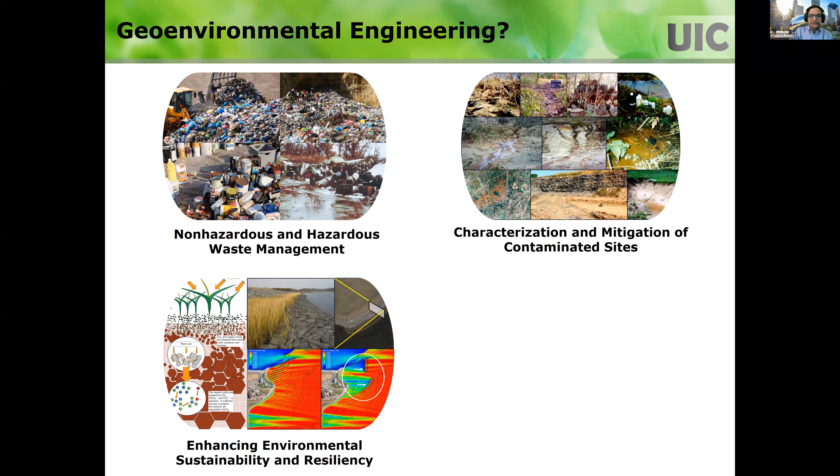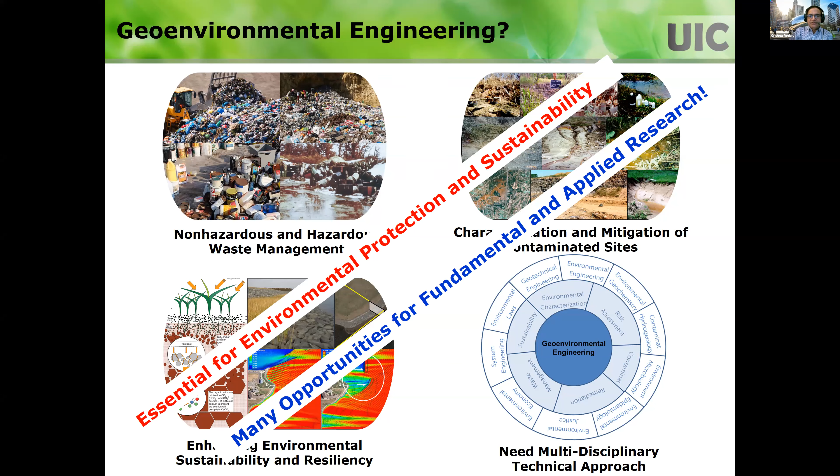Geoenvironmental engineering is a very broad field, dealing with waste management, mitigation of contaminated sites, and this broad area of sustainability and resiliency. It's not just geotechnical engineering or environmental engineering, it's a combination of those two fields, as well as a lot of other multidisciplinary background that you need for these kinds of geoenvironmental problems.

Can you see the presentation? Yeah, I can see it and I can hear you well. Yeah.

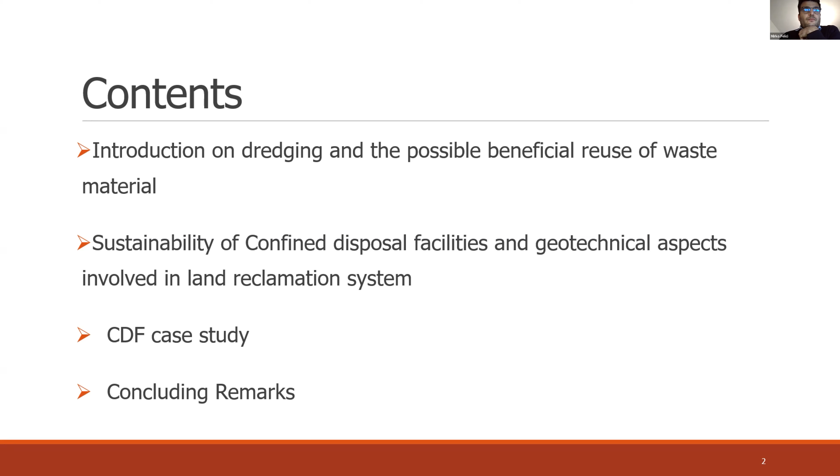Maritime shipping is considered the most fuel-efficient mode of transport. It moves approximately 90% of global trade, and so it is vital to domestic and international commerce. It is also considered a relatively environmental friendly transportation, accounting for less than 3% of global anthropogenic CO2 emissions.

Data here presented from 2020 show a significant upward trend for maritime trade demand. In this context, dredging is essential to develop and maintain navigable depth in ports, harbors, and coastal waters, as well as the development of port facilities. In fact, the reasons for dredging are principally capital dredging and maintenance dredging.

In this context, moreover, we can cite that environmental reasons could have great importance when it is necessary to remove material, for instance in a former industrial site where the level of contamination is very high. Referring only to our little country, Italy, the estimated dredging demand is about 130 million cubic meters for these years. This is a huge number that lets us understand how this problem has to be considered as an environmental problem and environmental issue.

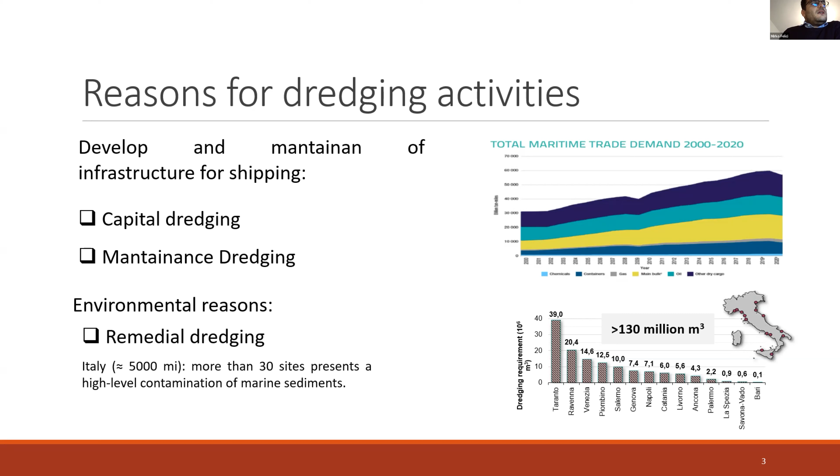We see how the dredging project has to be developed. Particularly, preliminary characterization of the material to be removed has to be done in order to evaluate its environmental quality through chemical, physical, and ecotoxicological analysis. Then we have to choose the most appropriate technology according to the seabed characteristics and to the sediment contamination also. For instance, in case of remedial dredging, we have to use technologies capable of limiting the resuspension of the solids and consequently the bioavailability of the contaminants. Afterward, places of relocation and possible recycling, on the basis of their environmental quality, have to be provided in advance.

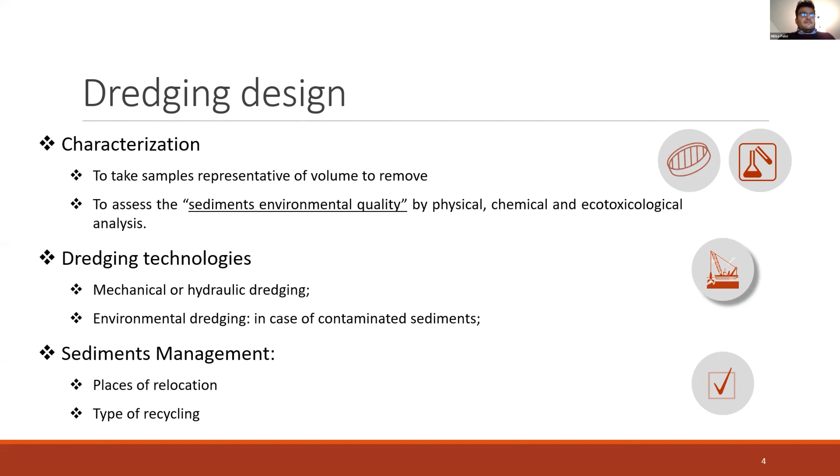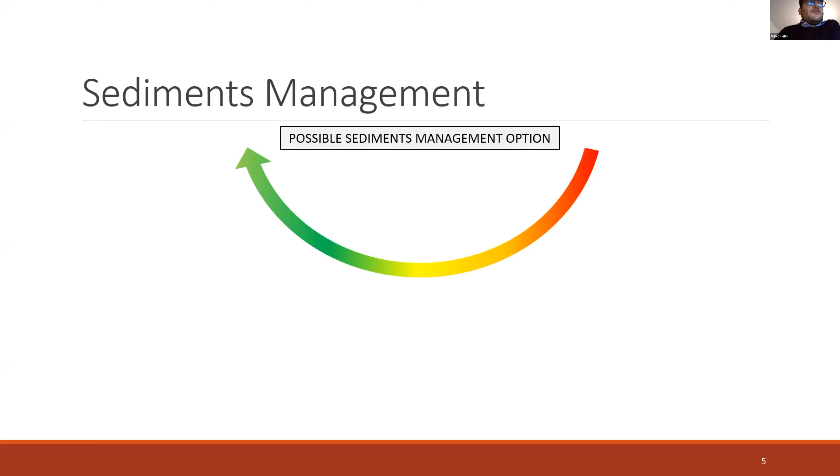Possible sediment management options depend on their environmental classes. In the box, you find the best possible use admitted from the environmental point of view. In Italy, for instance, quality classes from A to E are identified on the basis of the before-dredging characterization. Class A is the most clean sediment, usable for example for beach nourishment, and so there are no problems with A-class sediments.

The B class has very low contamination, and in fact there is the possibility to discharge the material at sea in special areas previously identified. The negative sides of this practice are well known, and it can only be used where other options are not feasible under the actual regulation. In fact, the negative sides of the practice are well known and it is too often abused, sometimes due to lack of planning in sediment management.

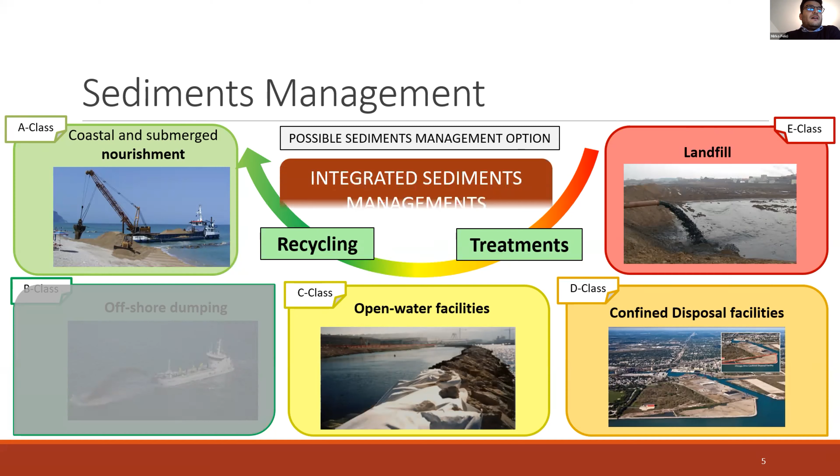In the decision-making process, a fundamental role is reserved to the possibility of recycling the sediment and carrying out treatments to recover part of it or decrease its contamination. The goal is to transform the sediment into a resource by pursuing the beneficial reuse of as much of it as possible. To this regard, an integrated approach of sediment management has to be developed.

A sustainable approach to this problem should be similar, in my opinion, to that used for waste, with methodic collecting and sorting, creating a range of facilities awaiting the dredged sediment as resources to be treated and transformed into recycled material, or simply reused as is in confined disposal facilities, for instance, or for a minor part disposed of in landfill when inevitable. The goal, however, is to minimize the amount of material taken to landfill, and especially that dumped into the sea.

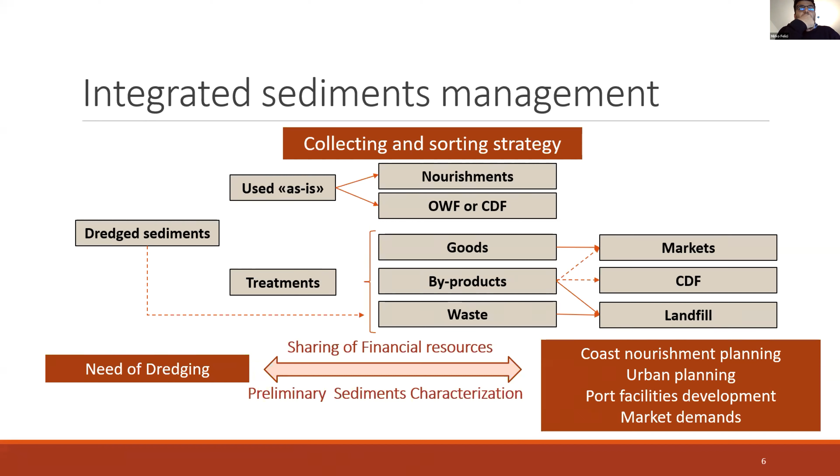To do this, we have to think of an integrated approach that links the need of dredging with those of coastal nourishment, urban planning, port facility development, and all markets and sectors interested in recycled goods from sediments - for instance, construction material or agronomic uses. I think a comprehensive approach to the dredging problem is justifiable in light of the large quantities involved and the volume of investment that has to be done by administrations every year, continuously.

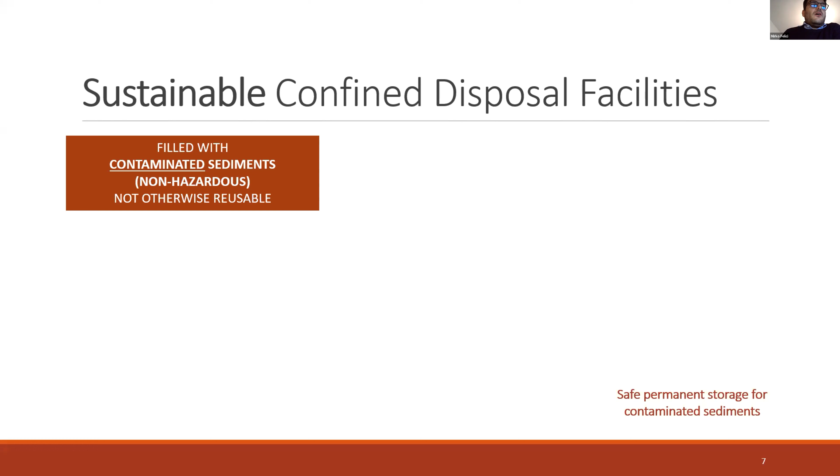So in this context, I would deepen into confined disposal facility roles and address the issue of the sustainability of their construction. First of all, because of high investment costs, in the CDF should end up only the non-recoverable parts, that usually have a medium level of contamination, non-hazardous, and are also fine-grained. Often the sediment that goes into confined disposal facilities is fine-grained because it is less valuable than the coarse part.

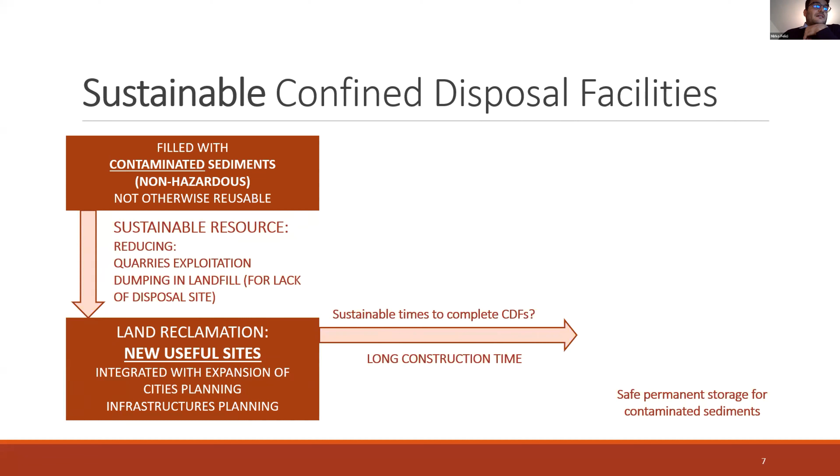So in this way, they can become a sustainable resource, for example in land reclamation projects, integrated with urban expansion planning to create new useful sites that should surely be integrated with the expansion of the city and planning. To this point, a long-term program is required, also due to the long construction time of the CDF.

The advantage is that the CDF remains available for managing multiple dredging operations over time, and in harbor contexts it could be useful, for instance, to provide partializing of the CDF to have the facility available for sediment disposal during time, while in the meanwhile using part of the area already filled.

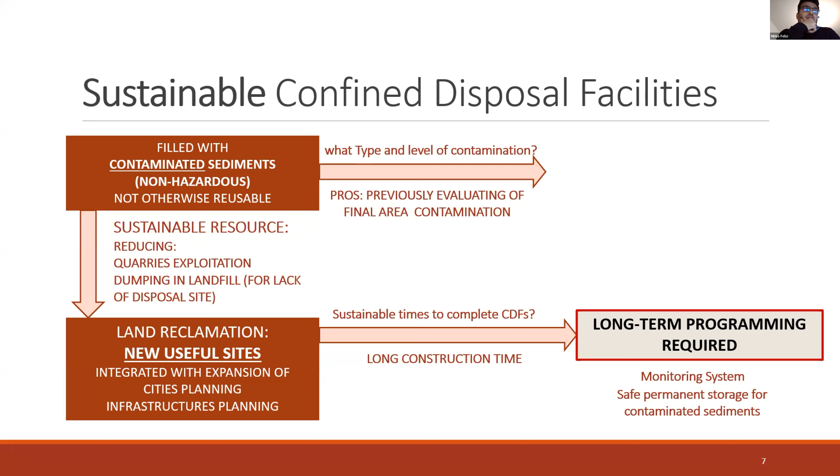But what type of contamination do we have to consider? Contamination level surely must be below the maximum level associated with the intended use of the facility. For example, when we think of green urban areas or industrial ones, the national regulation in Italy, for example - but I think in all countries - gives us different referring for the reuse of this material, and for the maximum level of contamination associated with this intended use. This is very important because otherwise it could generate a paradoxical situation in which we need to perform remediation in order to reuse the area after disposal, which has to be avoided, surely.

Long-term monitoring is important and has to be done in order to guarantee the efficiency of the system in the long-term conditions, surely.

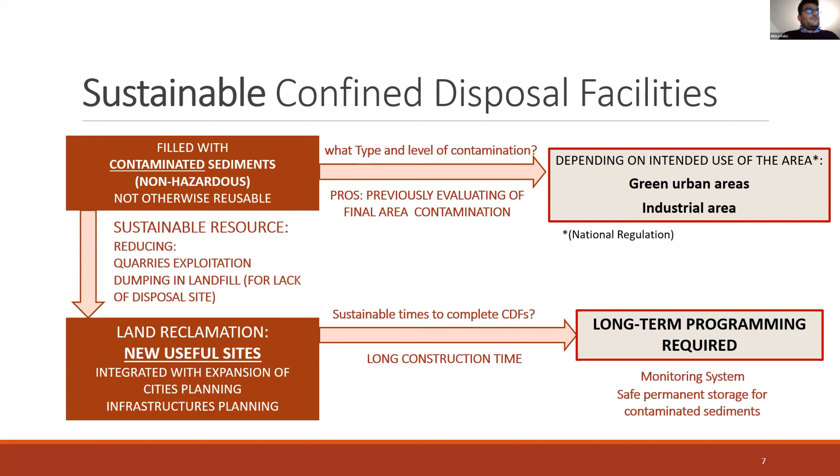The geotechnical and geoenvironmental aspects of a CDF project ensure that the impervious confinement guarantees the performance requested by national regulation, namely low permeability natural or artificial boundary, lateral and bottom, have to be at least equivalent to 1 meter of soil with permeability of 10 to the power minus 9 meters per second.

And organize the filling phase in function of the subsequent consolidation phase. Moreover, after disposal and sedimentation, dredged sediment typically has a very high void ratio, so it is necessary to design a consolidation strategy to make the area usable. Finally, determination of useful information on sediment behavior is essential to design the consolidation system and to provide a reliable prediction model.

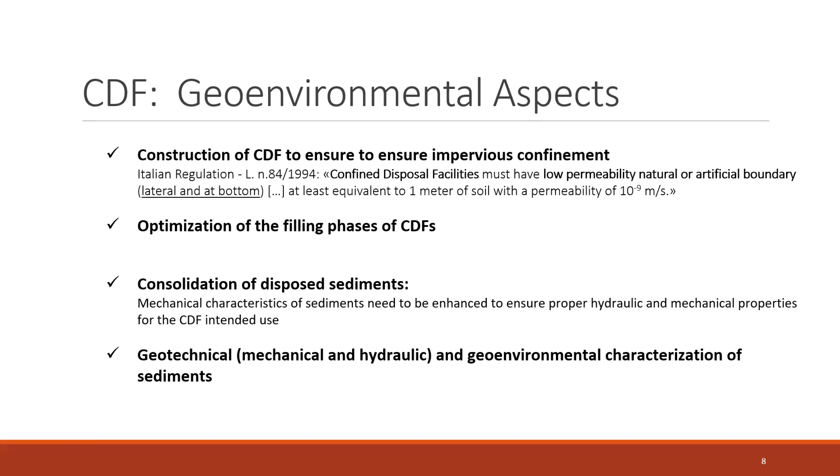To gain the first goal, the typical lateral cutoff that could be done is made by, for instance, a special sheet pile barrier with joint impermeabilization, or by a plastic barrier made with CB mixture. This last solution has different approaches for the land side, where excavation could be made with a round bucket or with a hydromill machine, and for the seaside, where the solution provides two sheet pile walls with CB mixture in the middle.

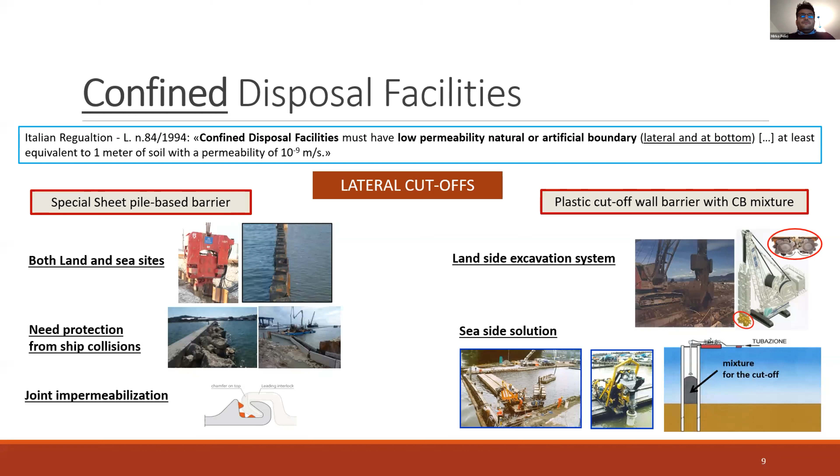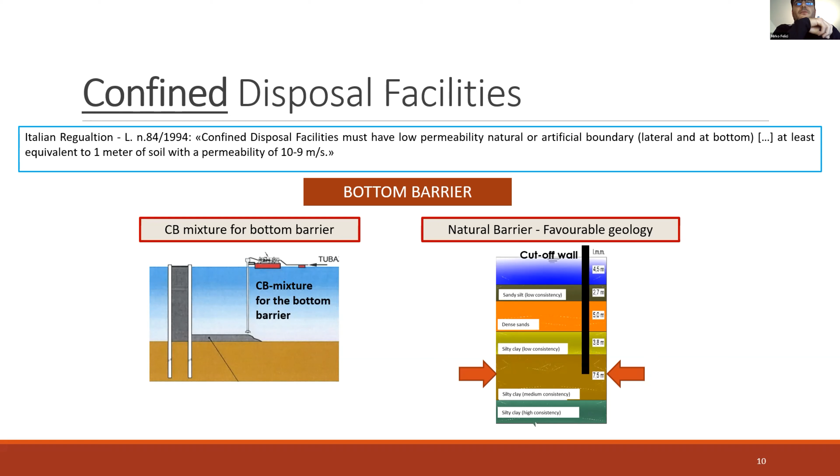CB mixture could also be used for the bottom barrier of the CDF. This is a typical solution, but it's not necessary if the CDF site has a natural low permeability layer underneath. So if the geology is favorable, we can use the cutoff wall to create the bottom barrier with the same low permeability layer.

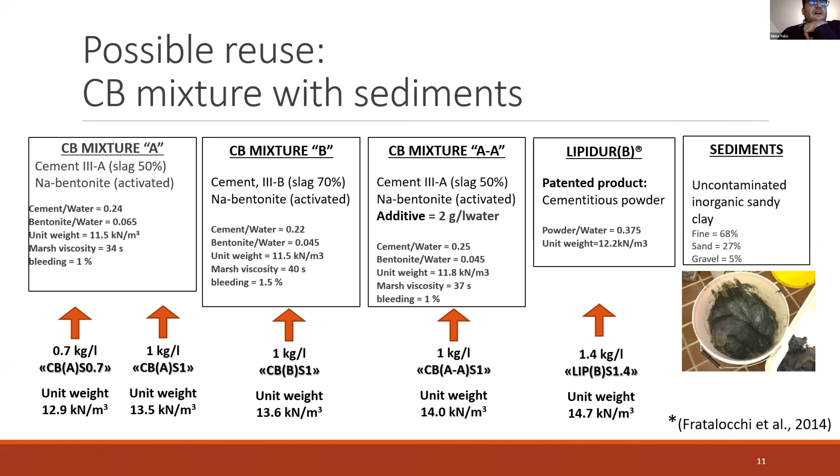Regarding the CB mixture used for the boundaries of CDF, I would show you a research carried out by Professor Fratalocchi, who studied the possibility of reusing sediments in a ternary mixture of cement, bentonite, and water. A quantity of sediment up to 1.4 kilogram per liter of mixture was added to different types of mixtures and studied in a flexible wall permeameter by means of long-term permeation in tap water and seawater.

We can see some results that show good behavior of all the mixtures in tap water, but we observe an increase in permeability of the conventional mixture in seawater. This does not happen in mixtures with fluidifying additive, and for the patented product that continues to show good results even in the long term.

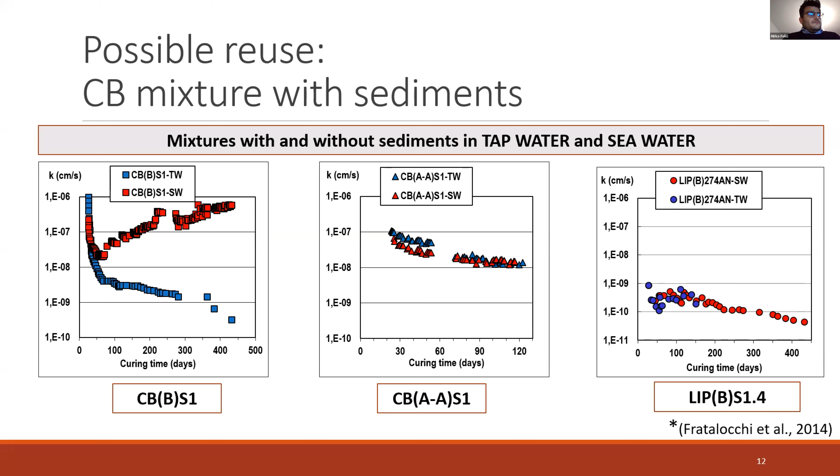When the CDF is filled and water is inside, we have to expel it into the sea. For this reason, CDFs are provided with floodgates. This operation could be a problem in presence of contaminated sediments that could be subjected to release of pollutants. It depends on the type of contaminant and the duration of exposure. In this context, water treatments could be necessary before proceeding to discharge the water.

Management of water could be a serious issue in the design of CDF, especially in the case of hydraulic disposal, which could introduce into the tank up to 10 parts of water for each part of solid, to give an idea, in a very short time. In case of mechanical disposal, instead, the volume of water is much lower, so it's preferable when possible.

Italian regulation is not very clear for the specific cases of water management. In different cases, we have found different approaches from different administrations. However, the respect of the non-regressive principle for the environment is always valid, so the discharge has to be done in a safe way.

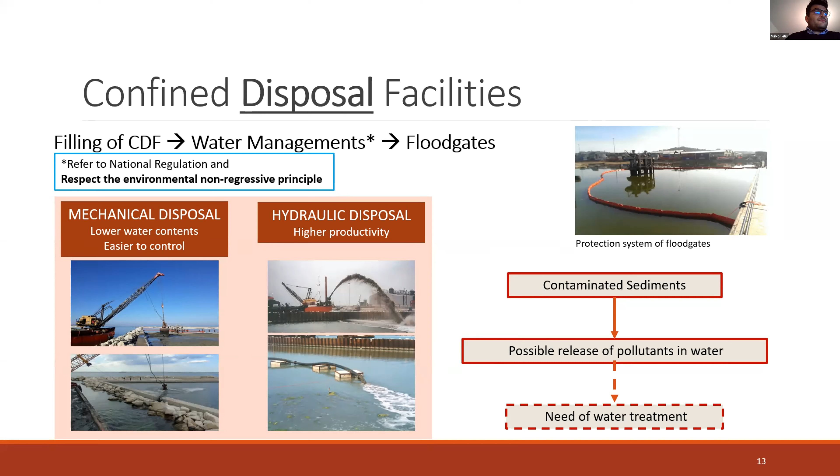After the sediment management process, it is desirable, as I have already said, that the CDF is conferred the less valuable and averagely contaminated part of sediments, which are usually characterized by fine particle size. Therefore, here I present only some of the possible technologies for the improvement of soil characteristics. In particular, I wanted to focus on two possibilities: treatment before and treatment after disposal.

The technique that allows at the same time to improve the mechanical characteristics of the sediment before disposal and to obtain a treatment that limits the mobility of some contaminants is solidification and stabilization with cementitious binders or lime. It can be realized by means of an inline plant that processes the material before it's laid in the CDF. In literature, there are some studies that have tested techniques with also sustainable cement, which is very interesting for the issue.

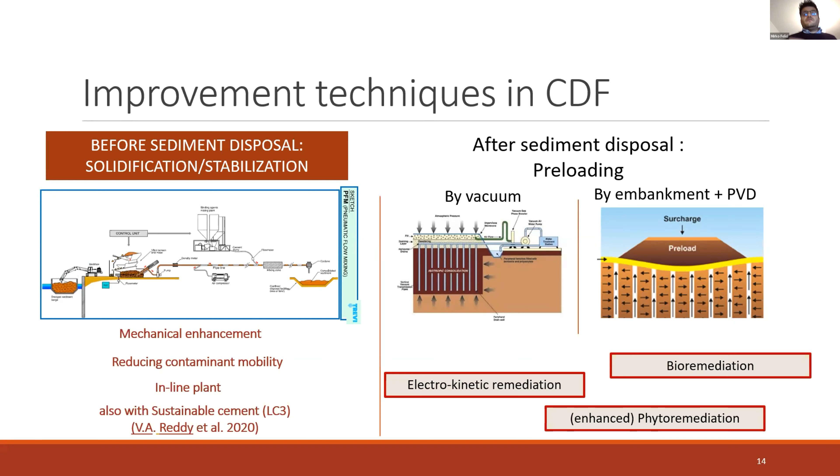We go into the case history, where I want to present the case of the Ancona administration that some years ago proposed an integrated sediment management at regional scale, trying to connect the supply - the sediments to be dredged in the different ports of the Marche region - and the demand of the territory, in particular coastal nourishments and the needing of the harbor of Ancona for a new container stocking area, land reclamation for a seafront of the city of Ancona, and the new cruise ship port, always in Ancona harbor.

This is a good example where the administration tries to use all the funding available to anticipate the problem of dredging and the necessity of the territory. In particular, a preliminary characterization of sediment to be dredged in every port of the region has been done for the assessment of sediment quantity and quality, to create a sort of sediment bank from which the territory can take the supply, the necessary sediments to create a new site, or for instance coastal nourishments.

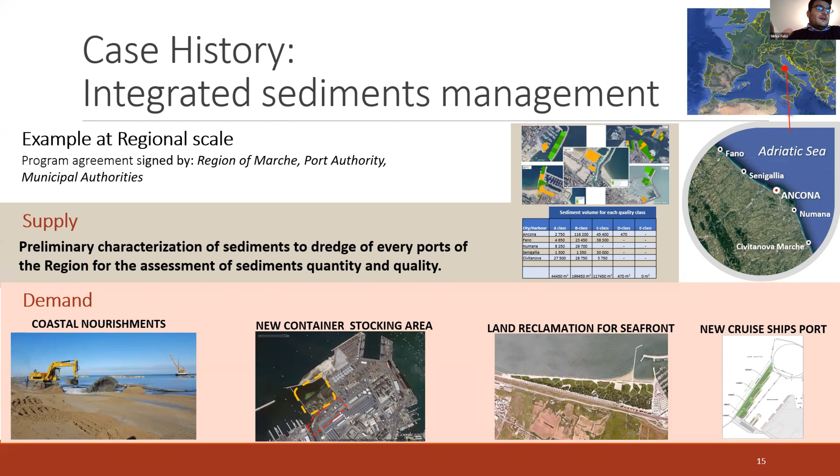In this context, the container storage area has to be thought of as a CDF, placed in Ancona Harbor, that has an overall capacity of 300,000 cubic meters, and that will be filled over several months with the sediment from the nearby ports.

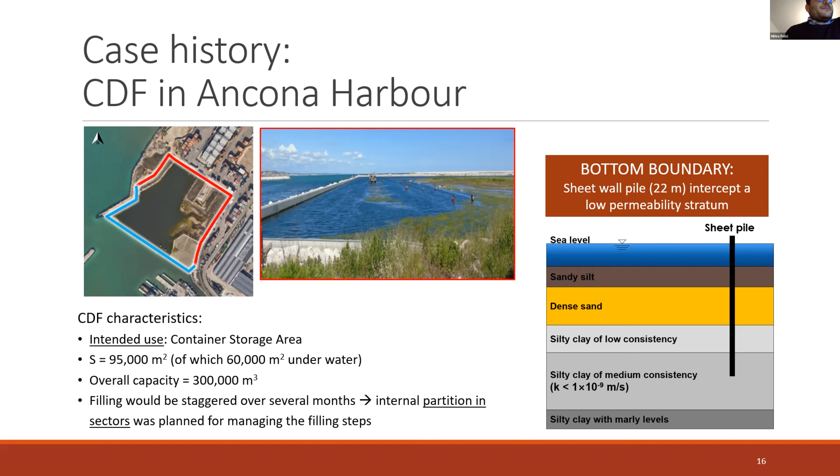The bottom boundary of the CDF in this case is done by a sheet wall pile that intercepts a low permeability stratum at a depth of about 20 meters. The lateral boundary is done by a sheet pile, and the joints have been made impermeable with a hydroexpansive synthetic resin to seal them. Moreover, an electrical system called Dixeran is being used to verify the continuity of the sheet pile with depth - that is another issue of the technology.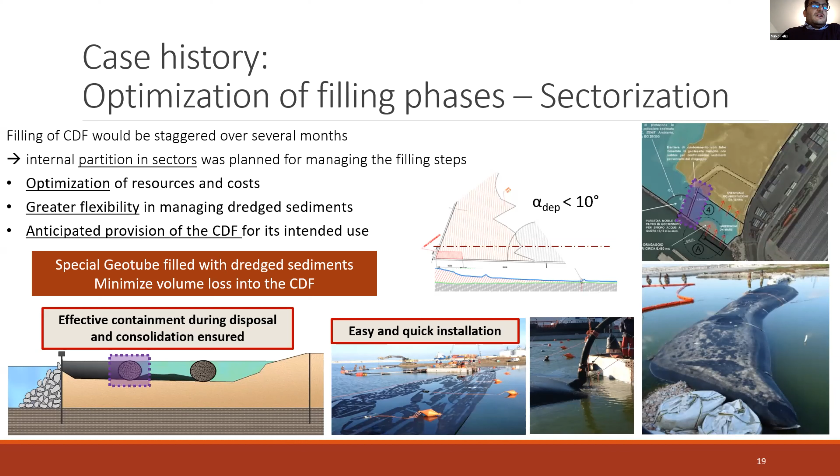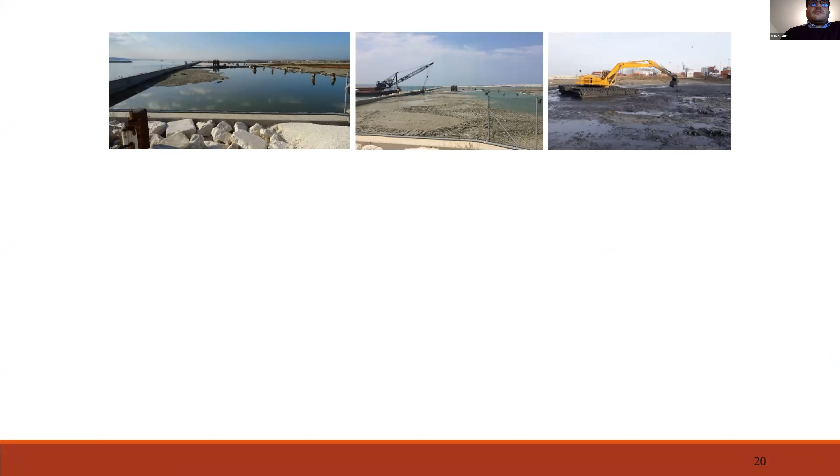So, to use the area for applying a consolidation system, we had to confine a sector of the CDF. This geotube solution was chosen because it could be filled with dredged sediment, minimizing volume loss into the CDF. It has been effective during the filling of the sectors, as we can see from this image, and there has been no instability of the geotube at the end of the filling.

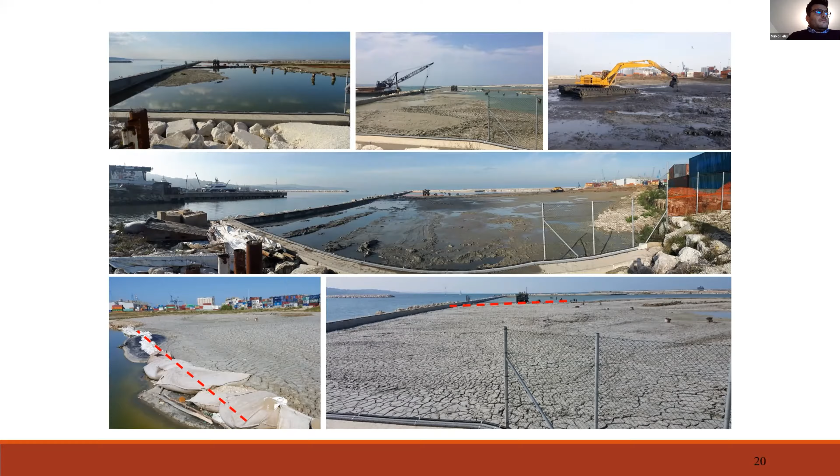The consolidation strategy chosen for the reuse of the area has been preloading by embankment coupled with prefabricated vertical drains. The reason we chose this strategy is that we had the availability on site of material for the construction of the preloading, recovered from the demolition of docks and port buildings during the CDF construction.

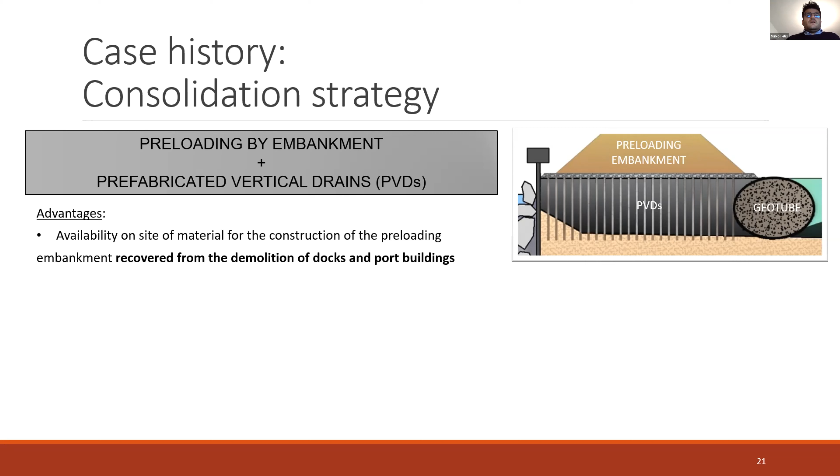So this material gave us the opportunity to use it as a moving bank - after the geotube placement and the disposal of sediment in the first sector, as shown in this scheme, the consolidation of sediment in the first sector could be done while simultaneously we fill the second sector. Then we can consolidate the second sector, and finally proceed with the consolidation of the geotube area. This procedure could significantly reduce the risks of instability in the zone close to the geotube.

So it's important not to go very close to this structure, because when we apply a high preloading, it could be dangerous.

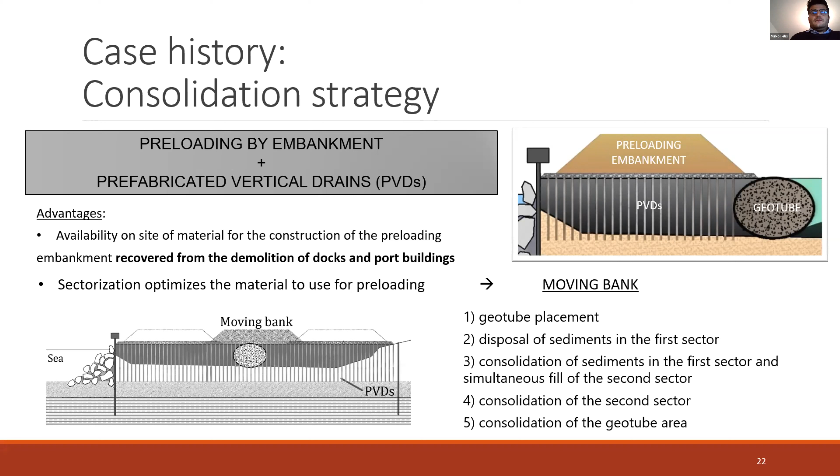With this procedure, we could significantly reduce time to get the CDF ready to use for its intended use, for a part of it almost.

After the filling of the sector, we decided to use the first sector as a test field to set up the operating procedure, firstly to verify the efficiency of the chosen strategy, and also to evaluate the real consolidation time and, by consequence, the embankment waiting time.

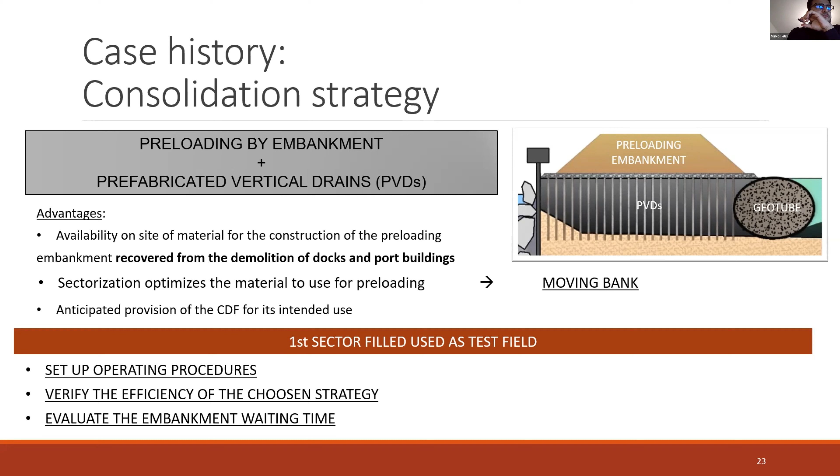A huge laboratory investigation was conducted on the sediments disposed in the first sector, which were characterized by predominant fine-grained composition. Oedometer and consolidometer tests have been carried out to investigate compressibility and permeability of the sediment, and some tests performed are reported. For further details, you could refer to the reference paper.

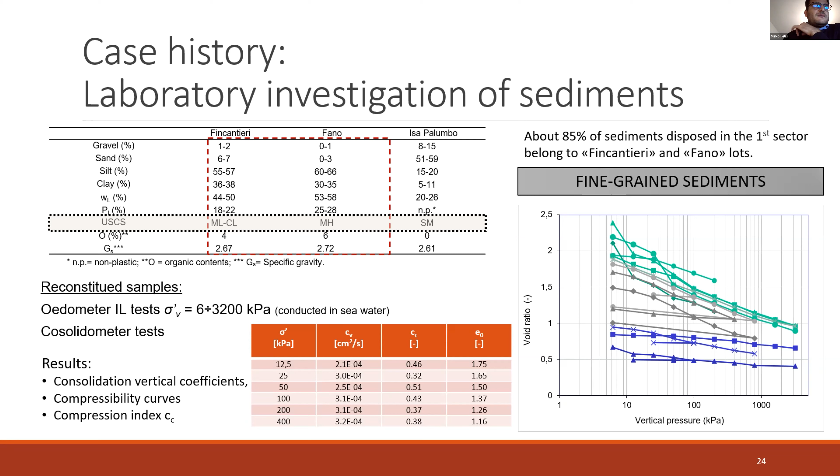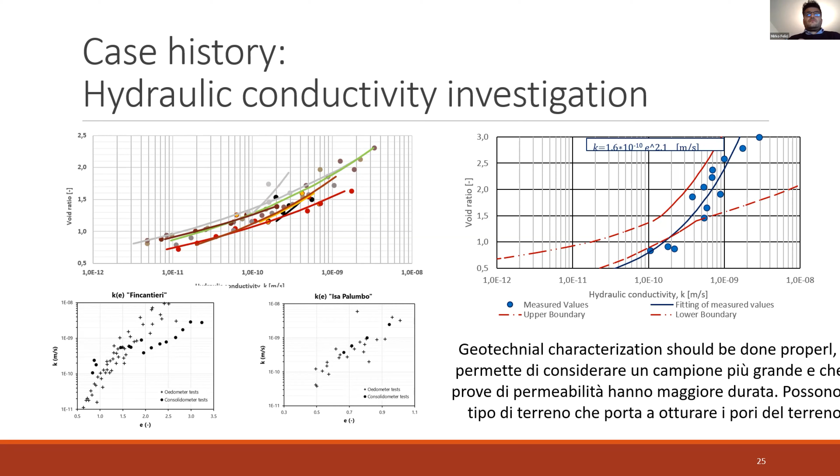An important part of the research is to establish the hydraulic conductivity of the sediments. As we can see, there is a spread of the results, deducted indirectly, determined by oedometer tests. We have done some new tests with direct measure in a rigid wall permeameter that show that the oedometer test tends to overestimate, at high void ratio, the hydraulic conductivity.

A very interesting research is being carried out that studies the compressibility and also the hydraulic conductivity of material when sediments have been used for treatments, for example, for bioremediation with bacterial and fungi.

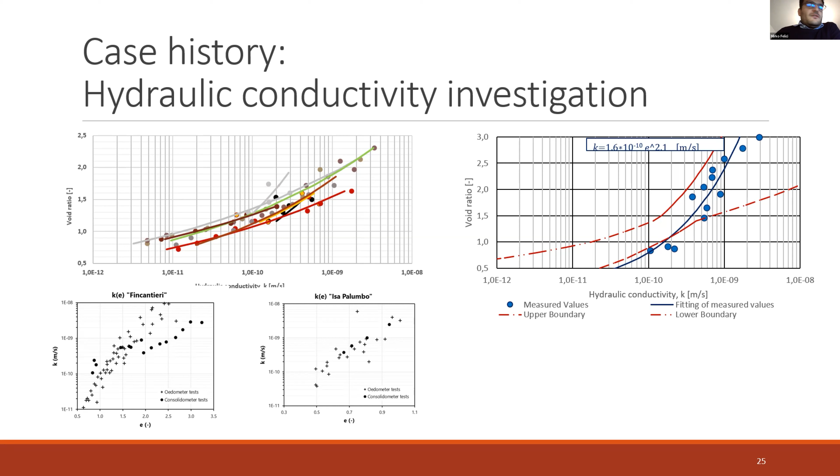Preliminary results of this research showed that there is no significant difference in the compressibility. For this kind of material, these are not obvious results, given that there is organic matter in the fine-grained sediments. I can't let you see the results because it's not published yet, so I only want to anticipate these results.

An in-situ investigation survey has been carried out to investigate the correct stratigraphy under the test field area and to estimate the mechanical and hydraulic parameters. The table summarizes the values of the main parameters assumed for the consolidation design.

We can see how the dissipation tests have been used to estimate the horizontal coefficient of consolidation.

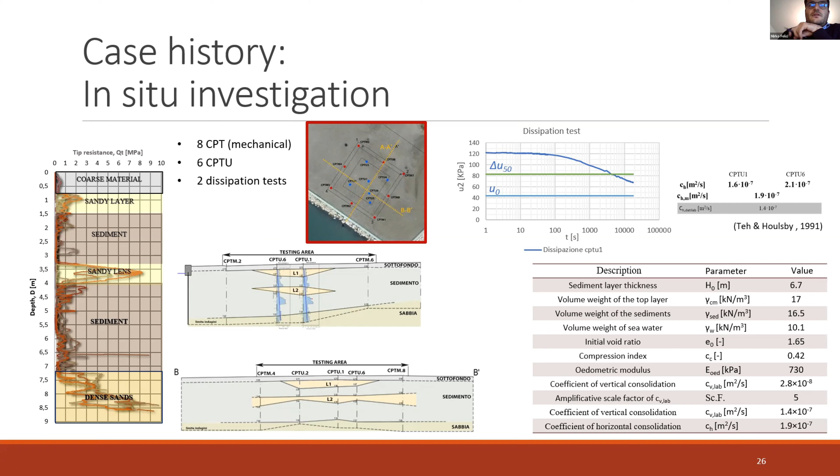The field scale test design has considered a stratigraphy with a coarse material that is useful as upper drainage, and fine-grained sediments of about 6.7 meters that are the compressible soil. A dense sand of about 8 meters depth is considered as a lower drainage to have double drainage conditions. This is possible because the stratum of dense sand is continuous for all the CDF.

Test field dimension is about 30 meters, and this is done to consider the one-dimensional deformation conditions. The service load is about 47 kilopascal (kPa).

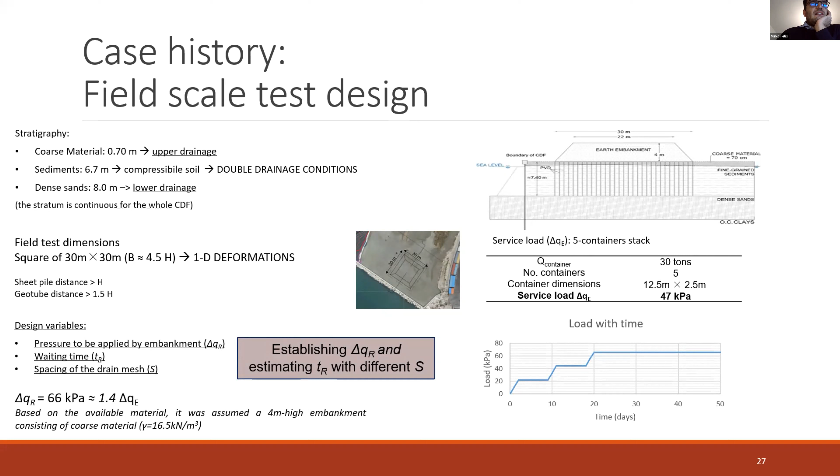The design variable considered is the pressure to be applied by the embankment, the waiting time, and the spacing of the draining mesh. Establishing the pressure to be applied, we have estimated the waiting time with different spacing of the draining mesh, considering a pressure of 66 kilopascal.

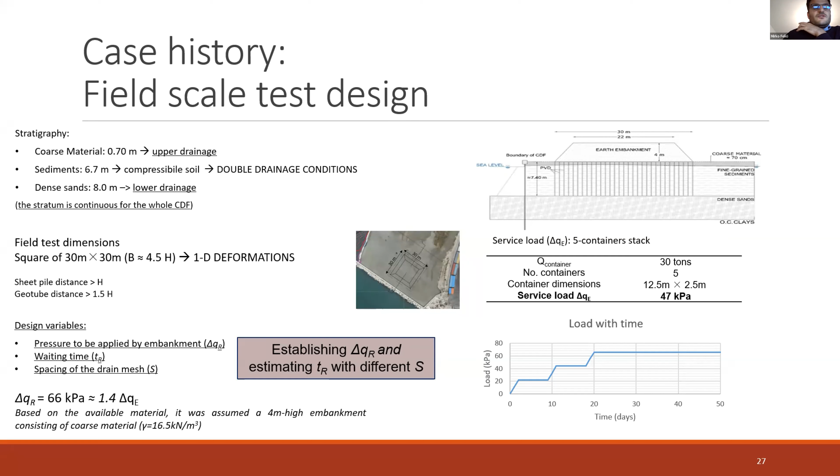We have considered not an instantaneous load, but one that varies with time, as shown in the graph.

Tang-Onitsuka theory of consolidation has been used to estimate the consolidation time. It considers radial and vertical flow in equal strain conditions, and also considers the smear, time-dependent loading.

The smear parameters have been established according to literature, and the band-shaped PVDs have been considered. The consolidation degree of reference is 80%, and with this condition, we have found the results for 1 meter spacing and 1.5 meter spacing.

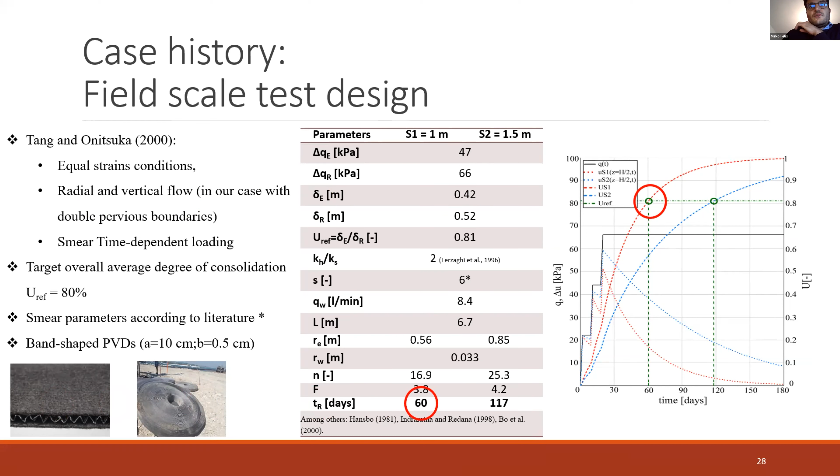According to the port authority, we have decided to use the spacing of 1 meter to reduce the time of consolidation.

The field scale test has been set up with monitoring instruments, and this is the result of the preloading. We have the pressure cell to measure the load applied by the embankment, 5 drive-in piezometers to measure water interstitial pressure, and 10 settlement gauges.

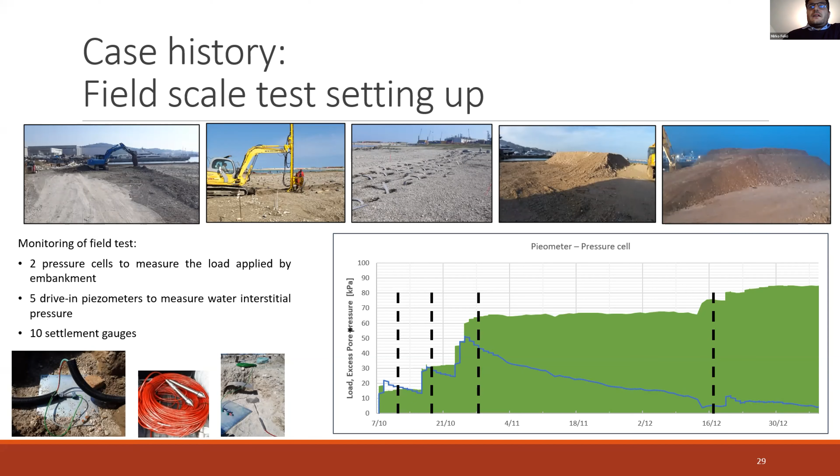We can see the preliminary data monitored during the field test. The results are not available today because they are to be published in a few days, so I can't show them to you today.

I finished. I have some concluding remarks. Particularly, we have seen that the sustainability of dredging activity necessarily passes through the integrated management of sediments.

Due to the quantity involved and their potential beneficial reuse, sediment management would deserve a global approach, as we have seen with collection and sorting, for example. The CDF could be, in this context, an excellent opportunity to use contaminated sediment as a sustainable resource for land reclamation sites.

Due to the long construction time, a long-term scheduling is required. The case history showed that to address this need, sectorization reduced the time for the provision of the part, and it could be a good strategy to give a part of the CDF for its intended use.

The level of contamination in the CDF is well known when we use medium contaminated sediment, and in case of any issue, the advantage is the possibility to implement remediation treatments in a confined environment.

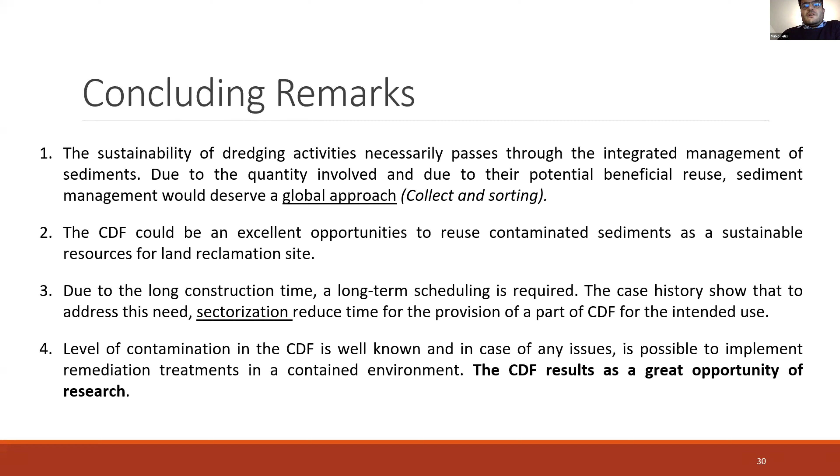From researcher to researchers, we can see how the CDF could result in a great opportunity to make research on field scale, for example. So it is very important for us in this, for example.

Regarding the technology about the field test and the CDF of Ancona, we can see that the technology used for the construction has resulted, nowadays, effective according to the monitoring data. Also, the sectorization with GeoTube has resulted sustainable in terms of saving CDF volume.

The realization of the test field, finally, has allowed us to verify the effectiveness of the consolidation strategy chosen, showing that with the configuration adopted, it is possible to consolidate the sediment in about 2 months.

This time has been respected, as the data have demonstrated. Moreover, it has provided a useful indication for the programming of the operative sequences, which is very important when we have to manage this kind of material.